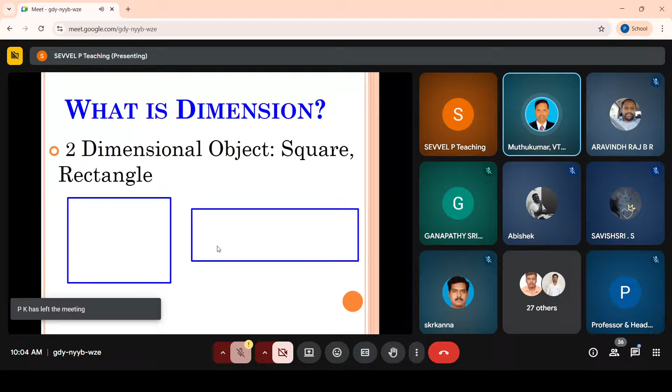Students, please be muted. Speaker has to have attention. Sir, shall I proceed, sir? One second. Sir, everybody make sure you are muted. Speaker has started his speech. Shall I continue, sir? Yes, sir. Please continue, sir. Thank you, sir.

So, a two-dimensional object is going to be a square or rectangle. Now, moving on to a three-dimensional object, any object which has length, height, and width is called a three-dimensional object. Traditionally, you are printing on an A4 sheet like this. Here, the thickness is negligible, so it can be called two-dimensional printing. So, these are 2D printers on the left-hand side, but on the right-hand side, you can see the latest type of printers, which are called 3D printers.

So, what do you mean by the term 3D printing? In local terms, it is called 3D printing, but technologically, we call it additive manufacturing. Additive manufacturing does not have any machining process. In simple words, it is opposite to subtractive machining. In subtractive manufacturing, you remove material from the given specimen and convert it into the required shape and size. But in additive manufacturing, you construct a three-dimensional object.

A three-dimensional object is constructed based on the CAD model which is given to the three-dimensional printing machine. It may work on the technology of FDM, laser metal deposition, selective laser melting or selective laser sintering. Whatever the working principle of that machine, it is connected to software, and in that software you develop a digitalized 3D model. A three-dimensional structure of that model is generated in the software, and whatever structure is present in that software is going to be presented in the form of.

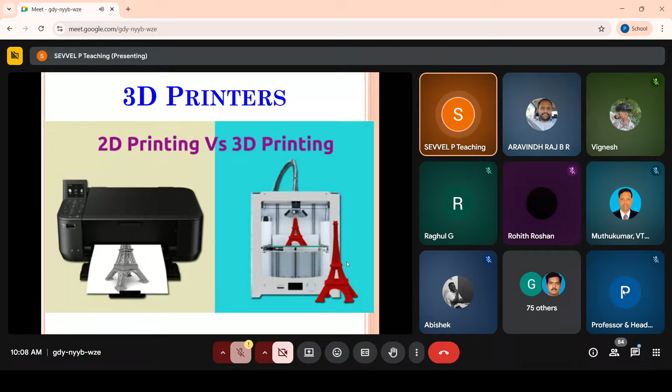Now you can see 2D versus 3D printing. Now I want to show you a small miniature of how the Eiffel Tower is going to be printed directly. I will be showing a short video. This is going to give you a glimpse of how 3D printing works. Here I think you can see the video.

So now if you see this screen, the printer is a very basic model, and this printer is going to print an Eiffel Tower in 3 dimensions. Normally, if you print the Eiffel Tower on an A4 sheet of paper, it is called 2 dimensional. But here you are going to see the 3D printing of an Eiffel Tower. You can see over here.

And if you see here, the printing does not occur entirely at once, it occurs step by step. In better words, technically, layer by layer printing is going to take place, as you can see over here. So the entire 3-dimensional structure is presented in a layer by layer manner.

Dr. Sevvel, sir. Yes, sir. Sir, your voice is not audible. Now is it okay? Now it is audible, sir. Before it was very silent. That's why I asked you, sir.

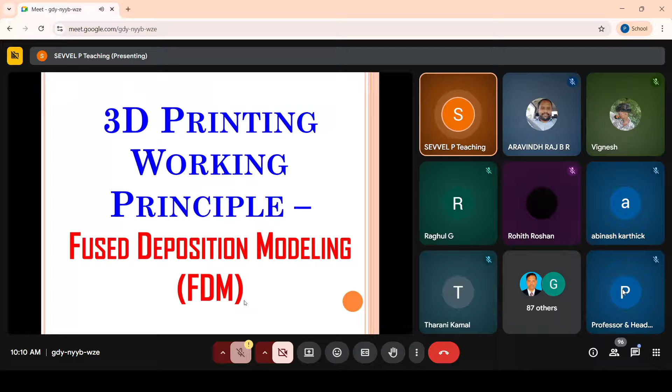Now moving on to how 3D printing works. What is the basic working principle? The basic working principle started with FDM. FDM stands for Fused Deposition Modeling. As you can see over here, I think the slide is visible. So one of the preliminary working principles of 3-dimensional printing was based on FDM, Fused Deposition Modeling. Here there is a machine, which is nothing but a 3D printing machine.

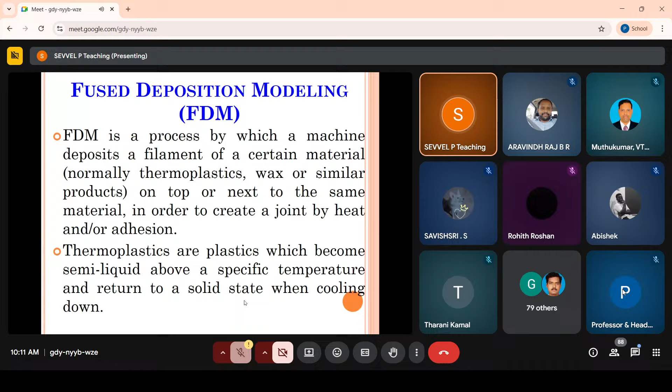It deposits the filament of a particular material. It may be ABS, PLA, Kevlar, nylon, or any type of thermoplastic material or other plastics. Layer by layer it deposits that filament, one over the other, and a bonding is generated by means of heat or adhesion. The plastic being deposited layer by layer is in a semi-liquid state, and it returns to its original solid state after some cooling period.

I think the screen will be visible.

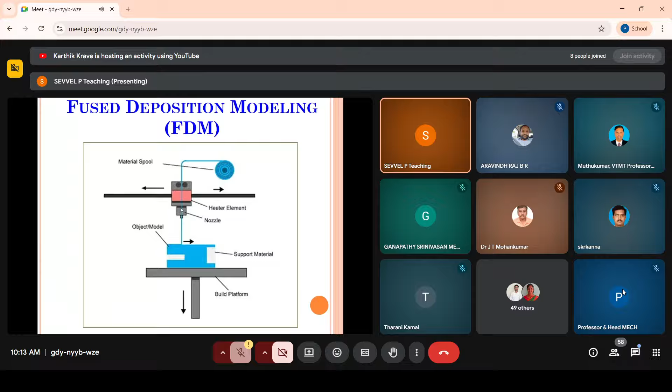So if you want to see animation, here you can see the animation of how the object is going to be printed in a three-dimensional manner using this fused deposition modeling. So here you can see this screen very clearly.

My screen is visible.

So here you can see the three-dimensional object which is going to be printed using this fused deposition modeling process. Here you can see the wire spool, and it is going to be printing in a continuous manner, layer by layer. On the right hand side you can see a teacup which is going to be generated, and on the left hand side you can see an object which is going to be printed layer by layer. So this is the basic working principle.

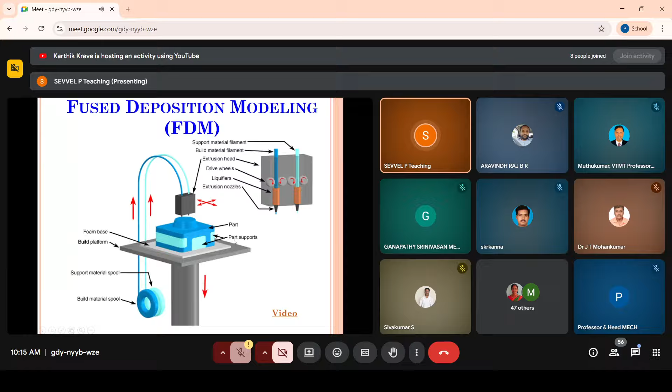And you can see the build platform, and over that the foam base, on which the parts are going to be built. So here you can see two different materials. One is the spool for the build material, another is for the support material. Now I am sharing a video which will give a detailed idea about fused deposition modeling. Please see this video.

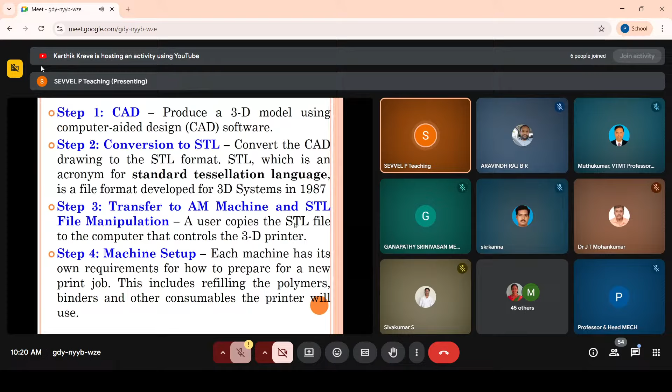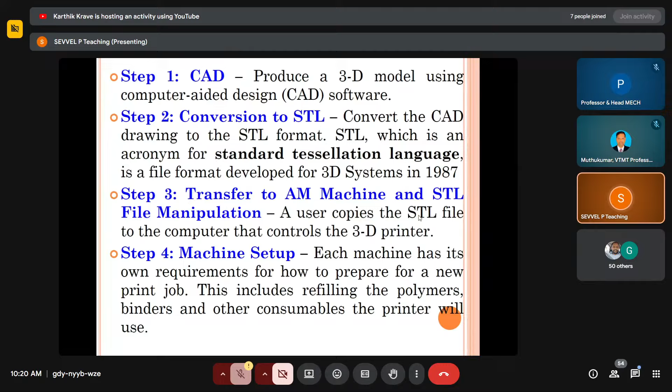STL format stands for Standard Tessellation Language. So whatever your CAD drawing, whether it is drawn in AutoCAD or ProE or CATIA or Unigraphics, it is going to be converted into STL format. Then this STL file is transferred to the additive manufacturing machine. That is step 3, in which the STL file is going to be manipulated, and in the 4th step, the machine is going to have its own requirements, and after refilling the polymers, the binders and the consumables, etc., the printer is about to start.

And the seventh step is going to be post-processing. It includes bathing or removing the unwanted additional structures, etc., so that the complete three-dimensional structure is obtained. Now I am giving you a summary of all these steps. The 3D CAD model is the first step. Then in the second step, you can see an STL file.

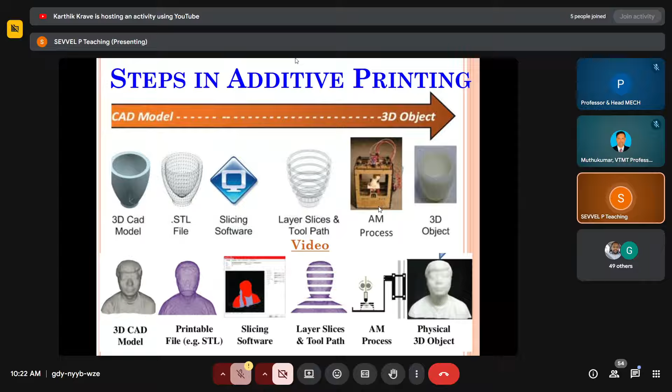Then slicing software is going to be used. The slicing software is going to read and manipulate the STL file, and it is going to print layer by layer. You can see the slices over here, and a three-dimensional object is printed, as you can see in this slide. Below, you can see the human face. And in the third slicing image, you are going to see a photograph which has some built support structures, so that the entire structure is supported and the object is printed.

Then applications of 3D printing you can see over here. These are the various applications. Now, rather than speaking about the applications, I am going to share with you a video which will give a detailed view of the various applications of 3D printing.

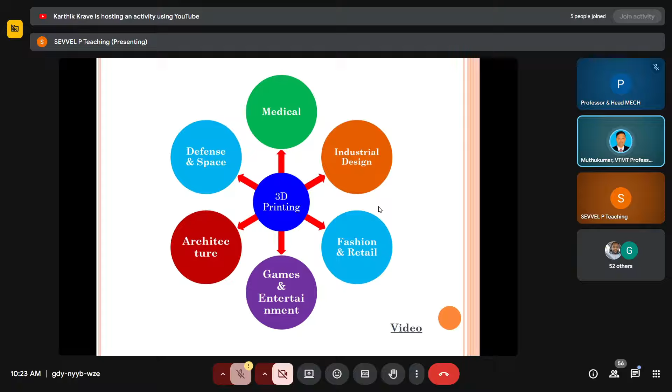Sir, Dr. Sevvel, sir. Yes, sir. Are you sharing any video, sir, right now? Video window is not visible, sir. Yes, sir. Video I am sharing, sir. You do not see that? No, sir. If you can share your entire screen, it will be good, sir. Entire screen. Okay, sir. Stop the sharing and share your entire screen, sir. I am sharing it again, sir. I think you can see the video now. Is it clear, sir? Now it is okay, sir. Okay, sir. Thank you, sir.

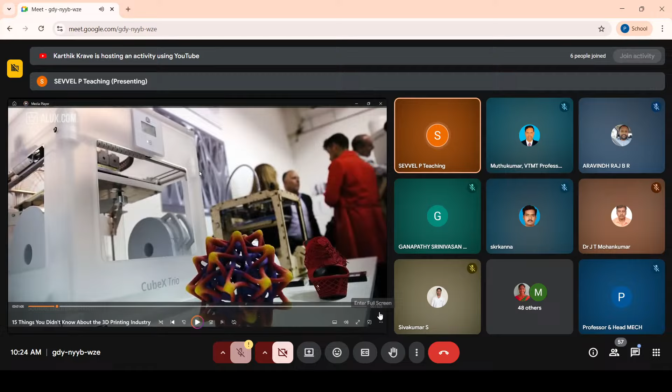So this video gives you a complete idea about the 3D printing industry, and it is going to share some recent advancements which have happened in the 3D printing industry and which have revolutionized various industrial sectors. So please watch this video.

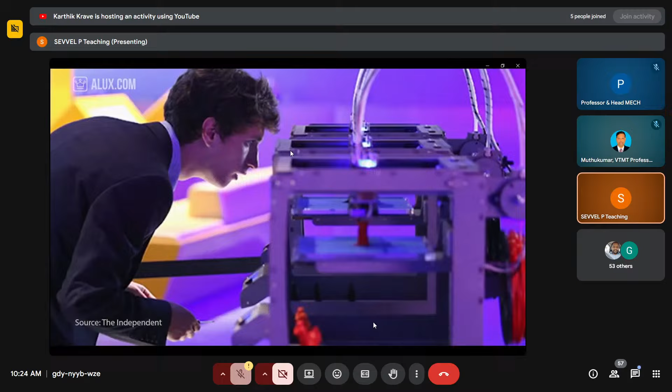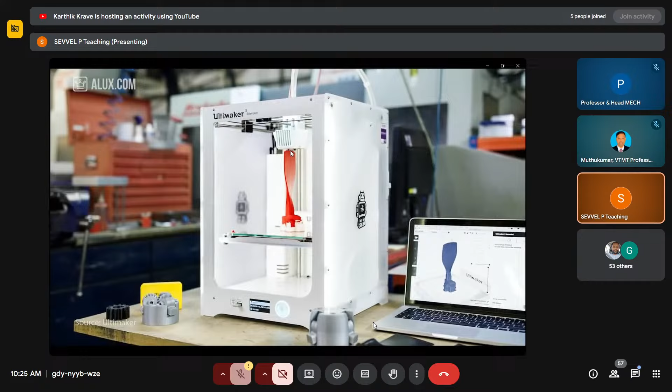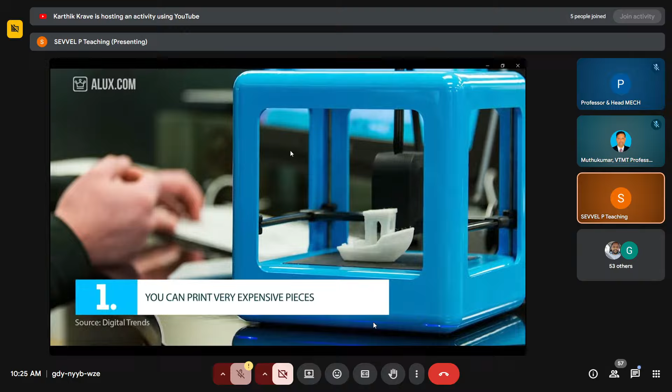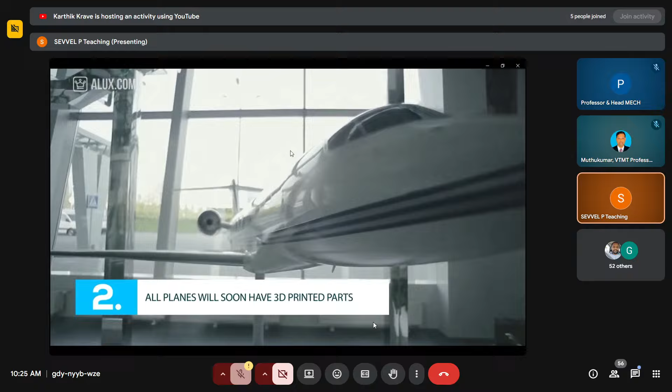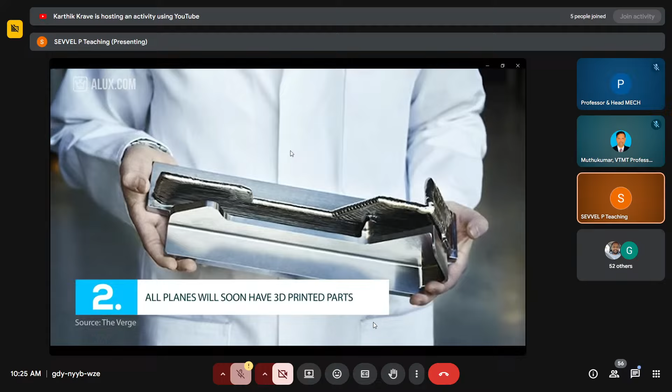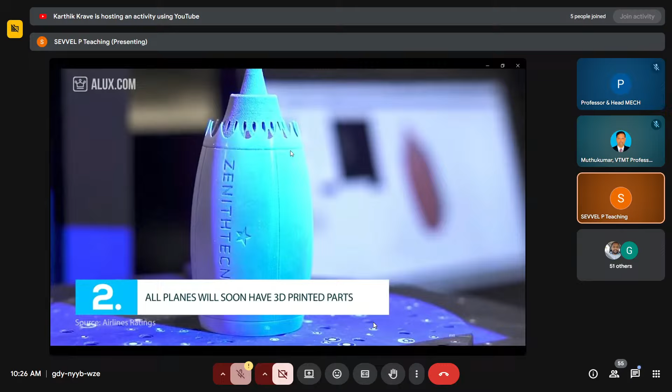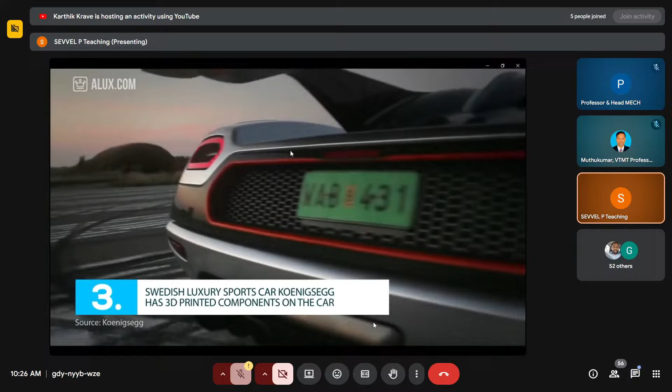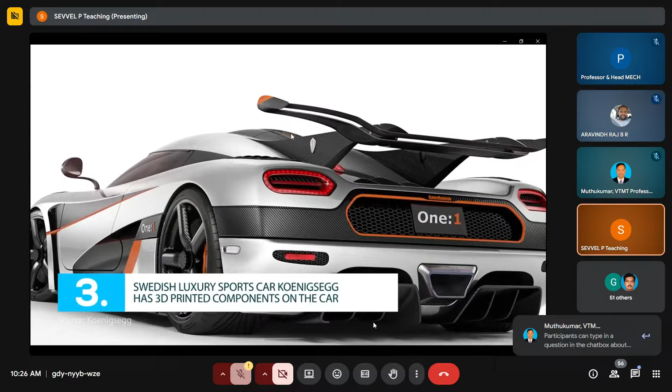Swedish luxury sports car Koenigsegg has 3D printed components in their car. If you're not a luxury sports car fan, you may not know the Swedish brand Koenigsegg, but it's one of the most beautiful, fast, and limited edition cars in the world. The company was born a little over 20 years ago. They only make around 15 cars per year. Of course, it's all manually done and handcrafted with state-of-the-art technology because these beauties are sold for over $2 million each. Although the concept only has a few 3D printed pieces, there is a car called Urbee that has the body and the windows printed.

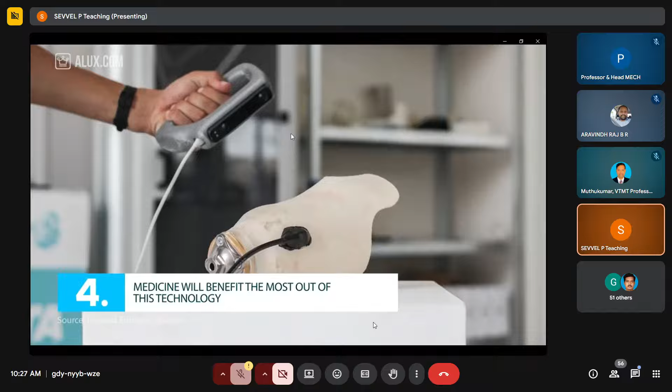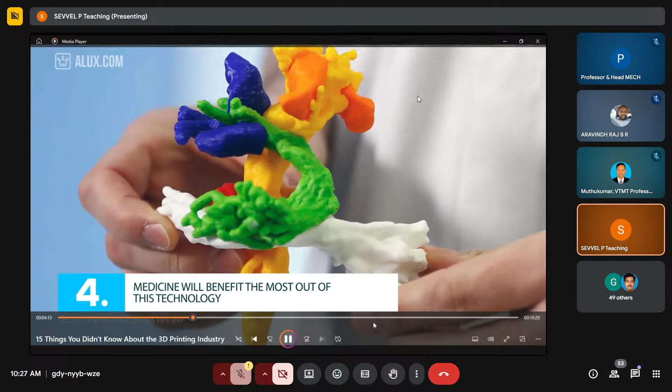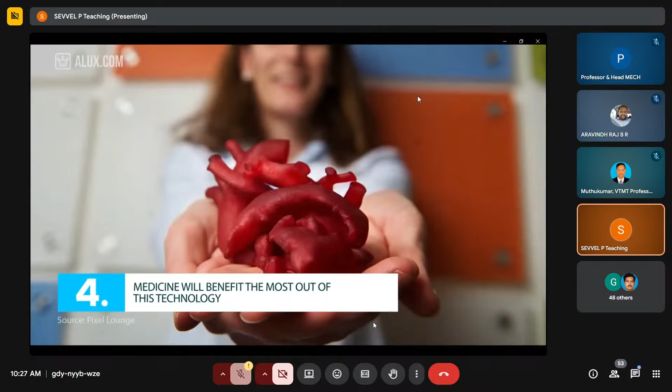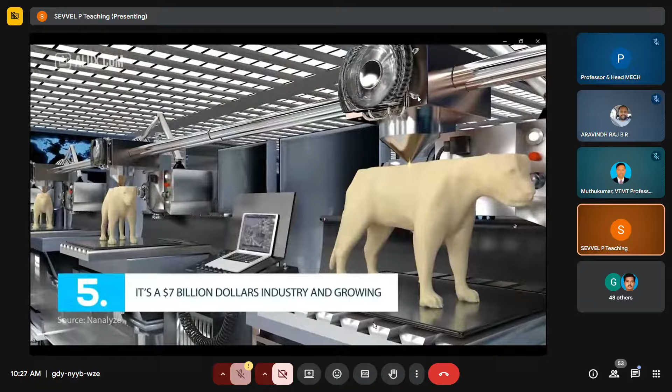Number 4. The world of medicine will benefit the most out of this technology. Next on the 3D printing list is humans. Technology has evolved so much that nowadays a few small things can be printed and then used for medical purposes on humans. This new discovery will help newborn babies and donors. So far, medical 3D printing can do the following: tissue with blood vessels, drugs, prosthetics, bones, heart valves, skin, and organs. These breakthrough printed supplies are currently being tested on animals, and if all goes well, we'll be printing anything in no time. Number 5.

So if you have seen this video, I think now it is visible. They are showing the three major sectors. One is going to be aerospace, another is going to be automotive, and another is going to be medical. Apart from this, it is going to be used in fashion and retail, defense, even in printing of drones, then architectural structures, games or entertainment purposes, etc.

But the three major areas in which 3D printing is gaining traction, which are of more vital importance and which are going to bloom in the coming years, are going to be the automotive sector, the aerospace sector, and medical implants. Not only medical implants, even any organ can be three-dimensionally printed using this 3D printing technology.

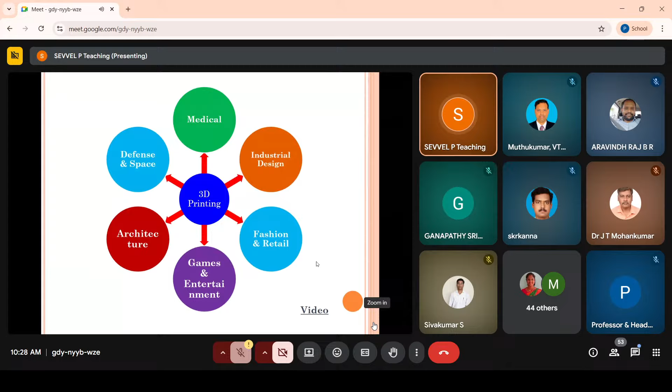Now, before moving on to selective laser melting, what are all the various types of additive manufacturing technologies available? Based on the working principle, they are categorized into 6 different types.

First, if you extrude the material, it is called fused deposition modeling or fused filament fabrication, that is FFF or FDM. The initial process using which we printed 3D material was FDM.

Here you can see the material extrusion processes. It is categorized into 2 divisions: one is the old and traditional fused deposition modeling FDM, and another is fused filament fabrication methodology FFF. Next, if you print the material using a vat photopolymerization technique, it is called stereolithography, that is SLA or DLP.

And if it is a powder bed fusion methodology, it is called selective laser melting, that is SLM, or selective laser sintering, or direct metal laser sintering process DMLS, or EBM. So it's 4 processes, out of which we are going to see SLM in detail today.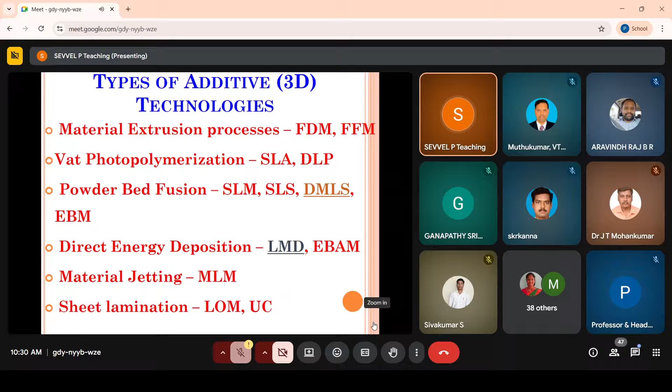Now I am going to share a video about LMD. I will be sharing the screen again so that you can see the video clearly. This is the video which elaborates about the laser metal deposition process.

Here you can see the direct energy deposition. Metal is being deposited in a direct manner using the form of the nozzle. This is laser metal deposition. The laser is used for depositing the material onto the surface of the build platform or the substrate, as you can see here, and metal is built layer by layer.

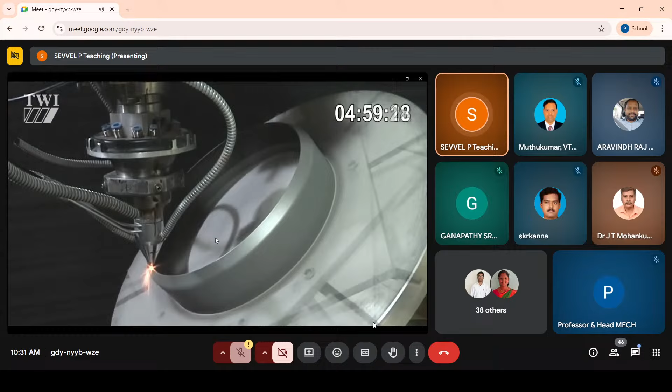On the right hand side, you can see the time running out. So as of now, this is the object which is being printed using this. And you can see the base plate, the platform carrying the base plate is capable of moving in multiple directions: X, Y, front and back, up and down, etc.

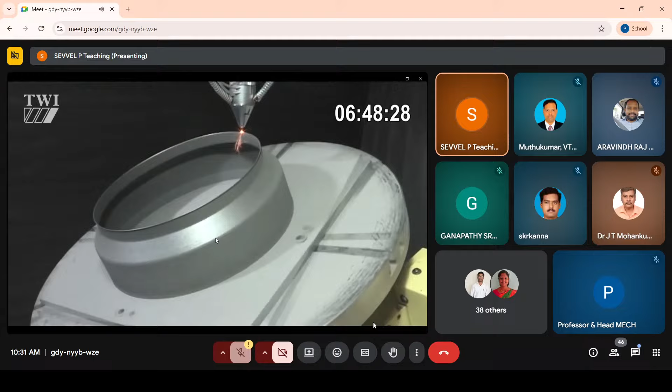You can see a structure getting printed out, and it is a three-dimensional structure. This is the direct energy deposition process, called laser metal deposition. This is also a 3D printing process, an additive manufacturing process, but it is completely different from selective laser melting.

There you use a powder bed fusion technology, but here you use a laser metal deposition, as you can see over here.

I want to show you the final shape. This is the shape which is being printed. So you can see the final shape. It is like a pot-like structure, but it is fabricated out of metal here. So it is a metallic pot. This is laser metal deposition.

So now moving on to the slide again. Now moving on to selective laser melting.

As I already told you, it is a powder bed fusion process, and it was developed in the year 1995 at ILT, that is Fraunhofer Institute for Laser Technology in Germany, and it was patented in the name of Dr. Dieter and Dr. Matthias, who are associates of the ILT research team.

In the selective laser melting process, you are going to have a bed which is full of metallic powder, out of which I want to fabricate the structure. So if I want to fabricate a structure out of aluminum, the bed is going to have aluminum powder. Or if I am going to fabricate a structure out of titanium, it is going to have a titanium bed, as you can see over here.

I will be showing a video which will explain clearly how this selective laser melting is going to work. So I will be sharing the screen again, so that you will be getting the video clearly. Please see this video, it is going to give you a detailed process about this selective laser melting and how it is going to work.

So here basically the principle is using the process of heat. Heat is going to be used for melting the metal powders. And you are going to have perfect precision in the part which is 3D printed, and you are going to print the material layer by layer, as you can see over here, a layer by layer printed structure.

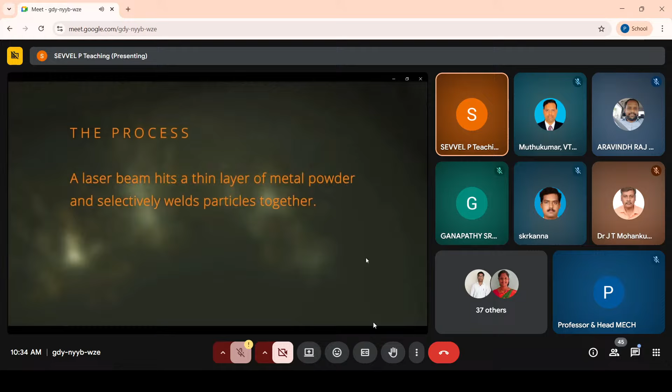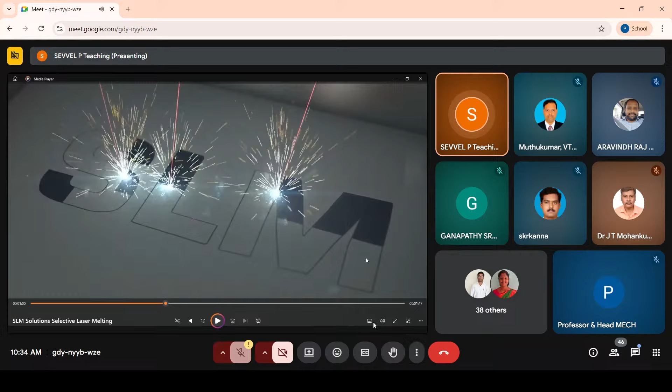So you can see this, you will be getting a clear idea. You can see a laser beam which is going to pass onto a powder bed, which is going to be fed completely with metallic powder, and layer by layer at specific parts the laser beam is going to melt that metallic powder, and a joint is going to be formed when melting takes place one over the other. Now you can see this, how it is going to happen.

So if you can see this, this is going to be the build material. The entire build layer is going to be filled up with the aluminum powder or titanium powder or stainless steel powder, as you can see over here. And a laser beam which travels at a particular velocity, that is called your scanning speed. And the laser power is going to be emitted at 500 watts or 600 watts or 700 watts, etc., based on the metal capability.

This laser beam is going to melt the metallic powders, and the laser beam falls on some particular specific place, and when it falls on that specific place, the metallic powder present there gets melted. When the layer by layer melting takes place, the 3-dimensional structure is attained. So that is going to be the working principle of selective laser melting.

In simple words, selective laser melting uses a high power laser, and it is a laser powder bed fusion process in which the metal powders are fused one over the other using the heat generated from the laser beam. So if you want, I can share a very clear video which shows how these 3D structures are printed.

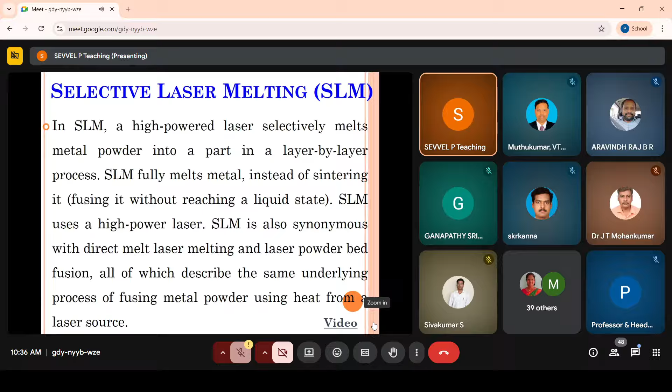So this is the structure I want to print. Say for example, this is the structure I want to print, and here you can see the exact structure which is going to be printed over here. Now for printing this 3-dimensional structure using selective laser melting, I am going to follow this procedure.

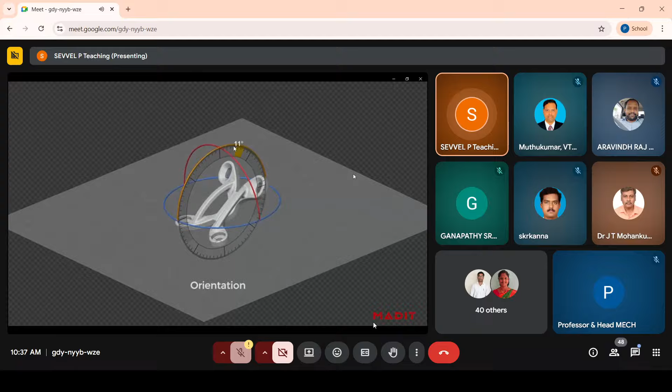First I am going to orient the angle at which the object must be printed. The object cannot be printed as it is in space; it requires some support. It must lie down on the substrate at some particular orientation or at a particular angle. For that, I need some support structures, so I am going to define the support structures first. This is going to be the working principle of selective laser melting.

Let me define this once again. If I want to print a 3-dimensional structure, I want to define the orientation, or specify the angle at which the object must be printed. So if I put it at some particular angle, the object cannot lie in space. It needs some supports; it must lie down on some support structures.

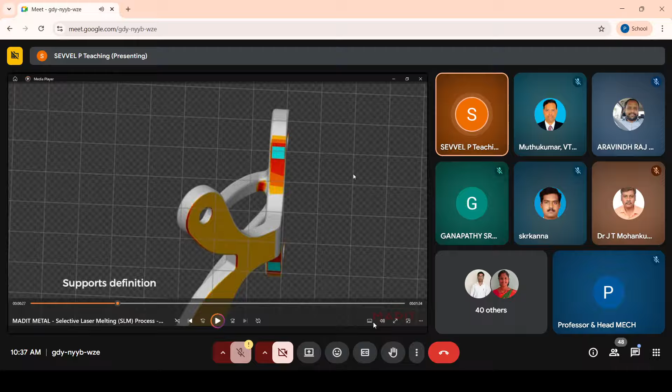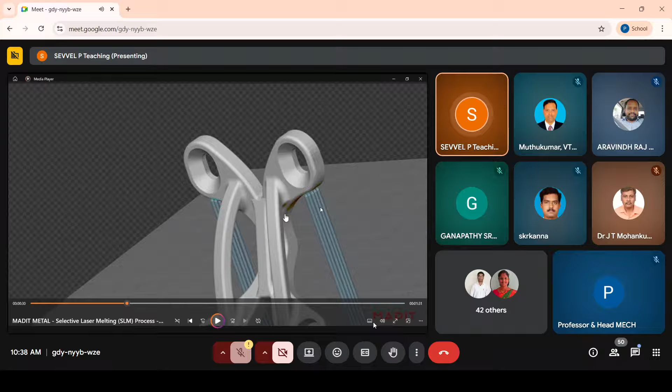For that, I am defining the support structures as you can see in this video. This is going to be support structures, which is going to be built out of the support material, which is going to be very thin when compared with the base material or the build material. Because I am going to break the support structures after printing the 3D structure, they are going to be unwanted after fabrication of the entire specimen. So for breaking them easily, they must be brittle and weaker compared with your build structure.

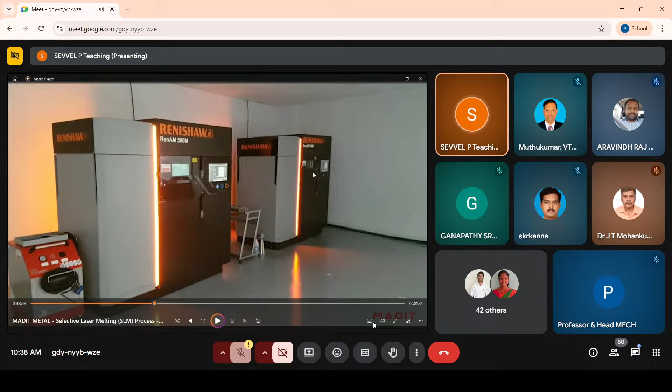So if I am going to fabricate in batches, you can see I am placing them at various angles. Now I am going to start the process. Here you can see a realistic photograph of a selective laser melting machine. Now they are going to print the same structure you saw a few seconds before, using this machine.

So this is going to be the entire platform which carries the metal powders. Now layer by layer, powder is being fed onto it. Here you can see the intensity of the laser beam being used for melting this metal powder—it may be aluminum, inconel, or titanium. It is going to be 500 watts, and it is traveling at a speed of 1 meter per second, so in 1 second it travels 1 meter.

So deposition takes place here, and the laser beam has melted a particular portion, as you can see. After the printing process is completed, here you can see the three-dimensional structure being fabricated. Now you can see the entire structure which got fabricated, and the remaining powder has been completely recovered—nearly 99% of the powder has been recovered, as you can see.

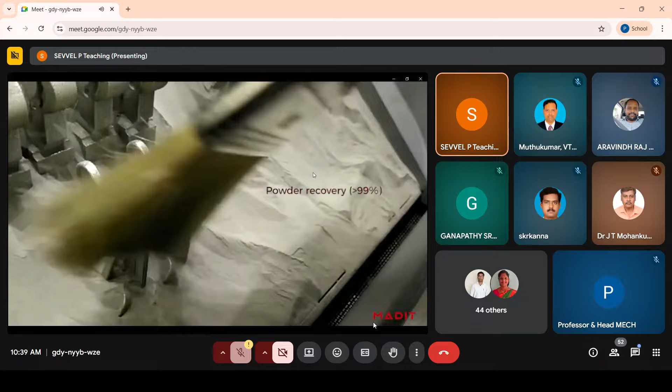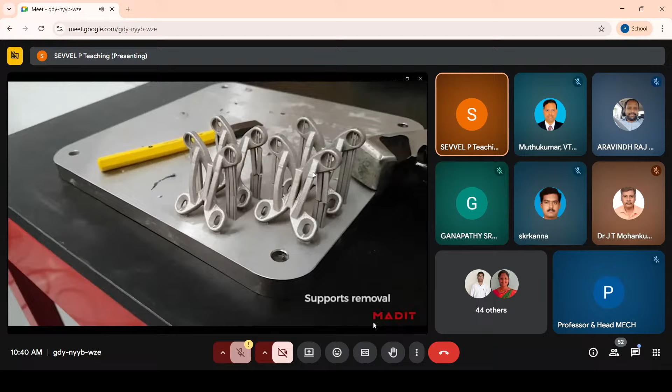So this is the entire printed specimen, but additionally it has support structures, which are going to be removed, as you can see. Now we are going to remove the support material—very simple, because they are very light and of minimum strength, so they are easily removed.

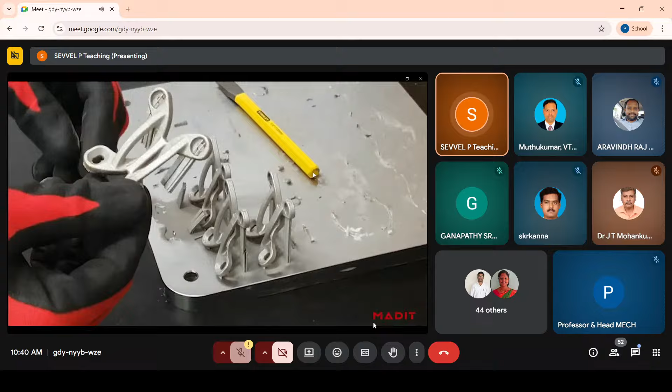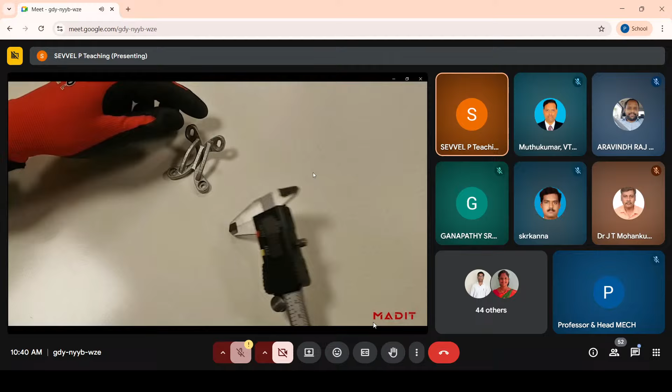After that, we are going to do the sandblasting process, so that unwanted material sticking onto the surface of the printed specimen is removed. And you are checking for the dimensions, as you can see—that is, the validation process is being carried out.

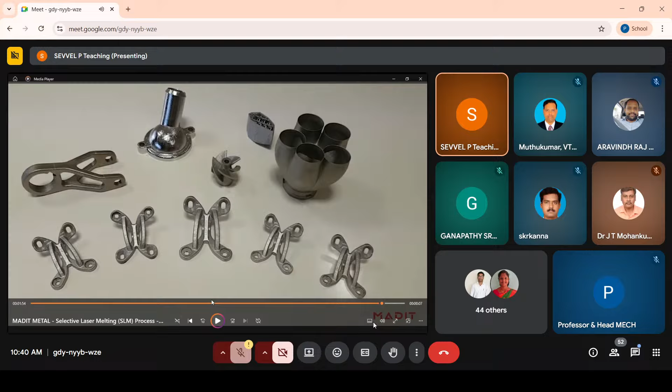So now you can see the entire 3D printed specimen using this selective laser melting. If you see this particular part, the laser beam is falling onto the metal powder bed, and in that portion, the laser beam transfers heat onto the metallic powder. The metallic powder gets melted one over the other, and fusion takes place.

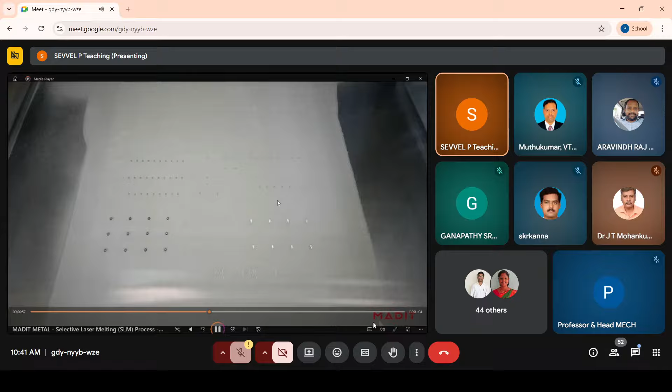So I will be closing this video.

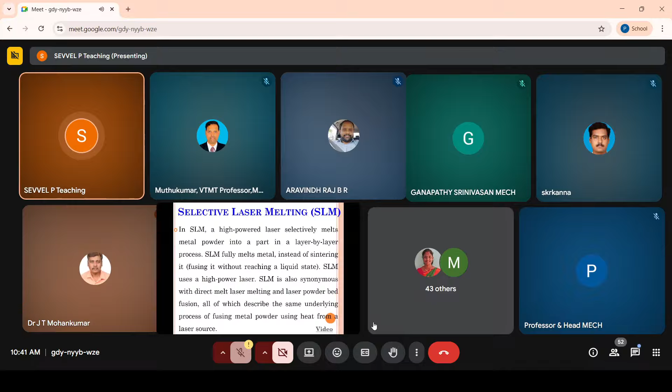So I think we have got a clear idea about selective laser melting. Whatever you have seen, now you can see it in the form of a three-dimensional view, as shown here. Now, moving on to the parameters.

With respect to the research scope in selective laser melting, in India we have selective laser melting facilities in Bangalore and in Chennai. In Chennai, this selective laser melting process is present in some private industries.

If you look at what parameters can be varied, there are a lot of them. First, the intensity of the laser and what type of laser you are going to use, and the scanning speed of the laser. Then, the strategy you follow for scanning the laser beam, and the hatch spacing left out. This relates to laser-relevant properties, and the spot size generated by the laser beam. So, in total, you have 6 parameters that can be varied with respect to the laser alone.

This area is going to be better suited for the optimization process, so that you can vary the optimization process, and you can use some advanced software, AI based, ML based building software for optimizing these parameters.

And with respect to the powder bed, you are going to have some parameters. First, the deposition strategy: how the metal powders are deposited, what strategy you are going to follow, what is going to be the depth of each and every layer, the density of that particular metal powder bed, its temperature, and how the building chamber atmosphere is going to be maintained. What type of gas you are going to use inside the building chamber is also going to play a very important role.

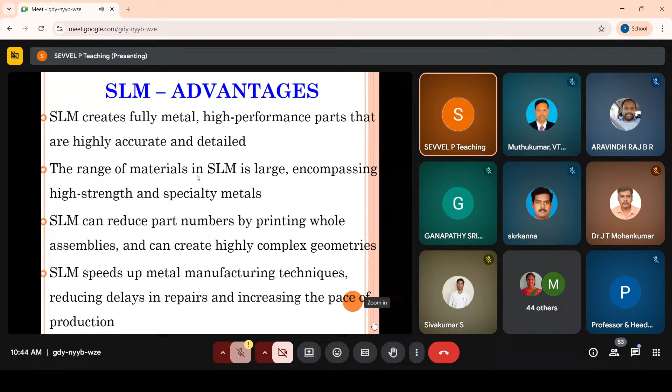And the parts fabricated using selective laser melting are going to be fabricated at a much faster rate when compared with other 3D printing processes, and it reduces the delay times. So these are the advantages of selective laser melting. Next, what are going to be the drawbacks? If you see the drawbacks, you need extensive support structures. That is going to be one of the most important requirements.

For support structures alone, you have to spend some amount, and you need a specific type of inert gas for maintaining the atmosphere inside the selective laser melting printing environment. And it is a high energy process, so it is going to have some stress, and dislocation of the parts is possible, and there is going to be some compromise in the structural integrity of the fabricated parts.

And the surface generated by selective laser melting is normally going to be rough, and you need some post-processing techniques to give it a perfect surface finish. These are all going to be drawbacks. Despite its drawbacks, selective laser melting is going to have a wide variety of applications in automobile sectors, aerospace sectors, and medical, especially dental and medical engineering equipment, implants, prostheses, etc. It is going to have a lot of applications.

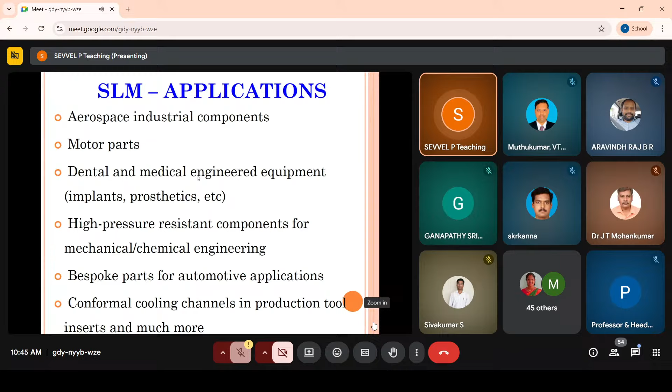Then it is used in fabrication of various types of production tool inserts, as you can see over here. Then, what are the types of materials being fabricated using selective laser melting? I already told you, you can fabricate copper, aluminum, stainless steel, inconel, nickel-based superalloys, cobalt, tungsten, and even titanium. And the tungsten parts fabricated using selective laser melting are very famous in the automobile sectors.

And you can fabricate various materials like 15-5 stainless steel, 17-4 stainless steel, maraging steels, cobalt chromium, and especially titanium alloy Ti6Al4V, etc. using this process. So this is about selective laser melting. Now, moving on to the various research scopes in selective laser melting.

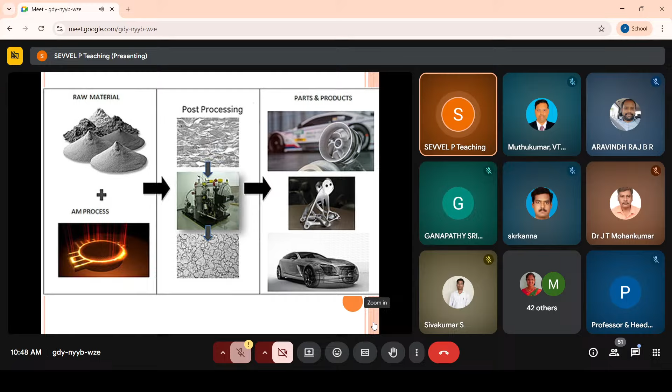And you are going to have the exhaust emissions, which have aluminum alloys as their raw material. It is going to be used in cooling vents. So these are the applications with respect to the automobile sector. And you can see the process: your raw material is going to be in powder form, and you subject it to selective laser melting. As I already told you, selective laser melting needs a lot of post-processing, and the automobile parts are fabricated, as you can see in this slide.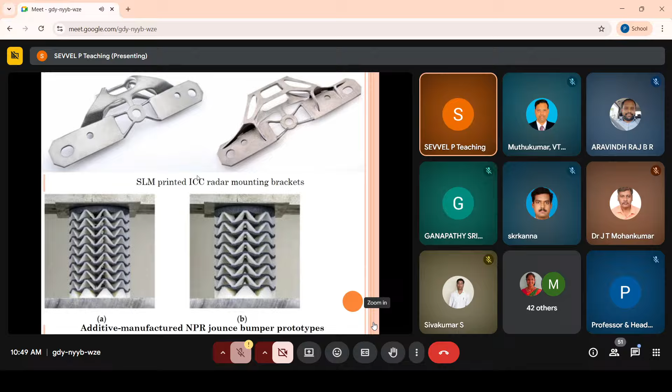Next, you can see some of the automobile components which are fabricated using this selective laser melting process. ICC, Intelligent Cruise Control radars. You would have heard about ICC, which is used in recent automobiles, which stands for Intelligent Cruise Control. So those radar mounting brackets and the bumper prototypes are fabricated using selective laser melting.

Moving on from the automotive sector, we also have wide applications in aerospace sectors. The major structural seat components in aerospace are fabricated using this selective laser melting process. You can see the armrest, the seat leg assembly, the baggage bar, the spreader bars, even the seat back frames, the back pan, the cross tube; everything is fabricated as selective laser melted three-dimensional structures. So the armrest structure, the back pan, and the seat back frame structures fabricated this way are used in aerospace structures.

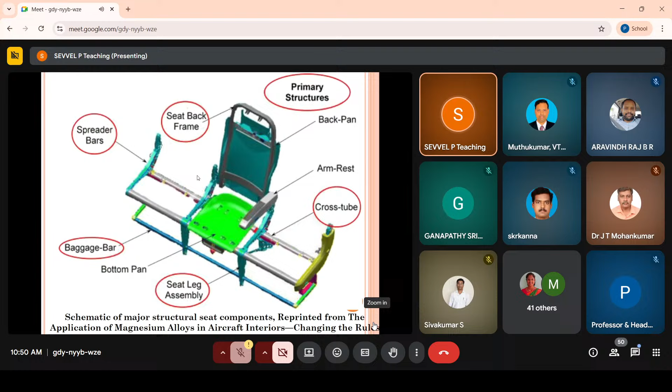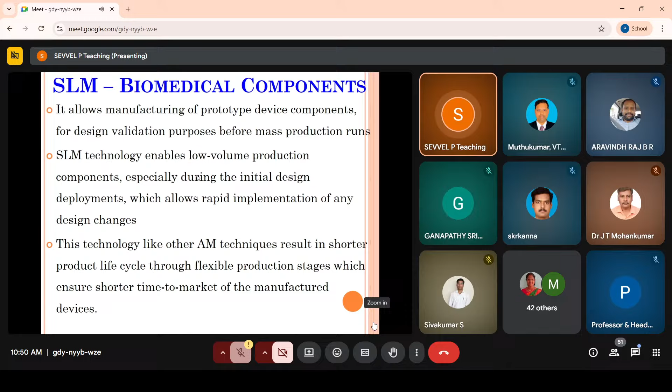And I don't want to limit my presentation to automotive and aerospace sectors alone. Another scope is available even for mechanical engineers, because a lot of biomedical components are also fabricated using this selective laser melting process. If you look at the components being printed and the advantages, you have a wide variety of design freedom in designing these components. The cost is very minimal compared with traditional methods, the parts are fabricated in time, the quality perfectly meets the requirement, you can validate the entire design by the prototype itself, and it is an environmentally friendly process.

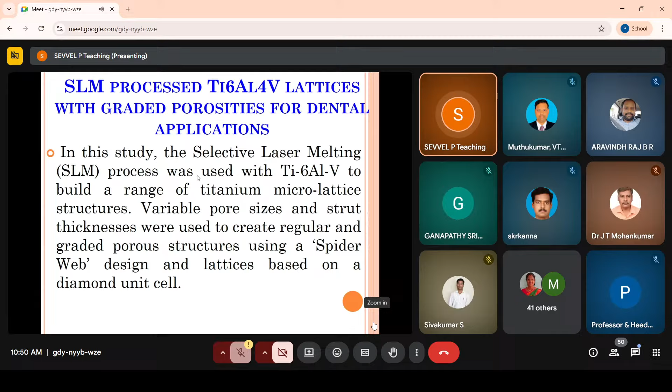So I want to share a paper on printed titanium, especially for dental applications. Now I'm going to show the video so that you get a clear idea of how the structure is printed. It is going to be a dental structure. So you can see the dental structure being printed using this selective laser melting process.

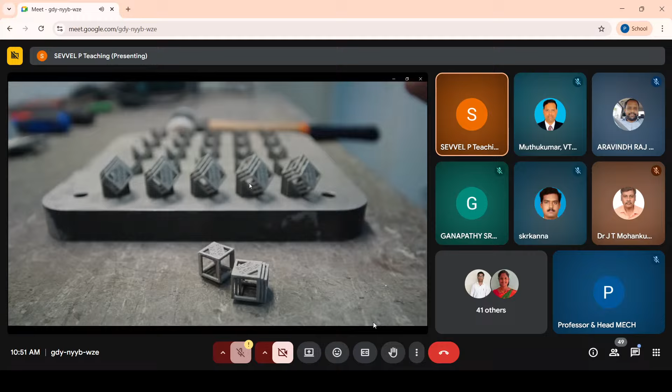So you can see some of the structures which are being printed using this selective laser melting process. You can see the laser beam is being passed on to the bed, which is going to carry the entire metal powders, and layer by layer the laser beam is going to melt those metal powders, and another powder layer is going to be fed onto that. So layer by layer melting of the metal powder is going to take place, and finally you are going to take the specimen out, as you can see over here.

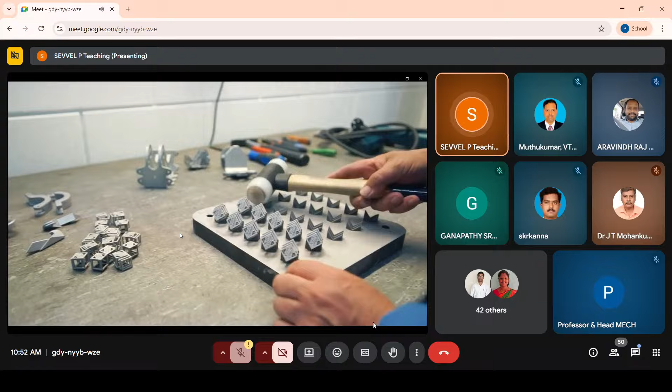This shows you the realistic view of the entire 3D printing machine, as you can see over here, and they are collecting the entire powder back. Nearly 90% of the powder is going to be collected back, and now they are taking the fabricated specimen out of the substrate, that is out of the building plate. You can see over here. So this is going to be a printing of structures in mass production, which is going to take place in batches.

So like this, instead of creating solid dental implants, they have created spider web like structure dental implants, which are going to have enhanced quality and enhanced performance when compared with the traditional type of dental implants. So this is going to be one of the areas.

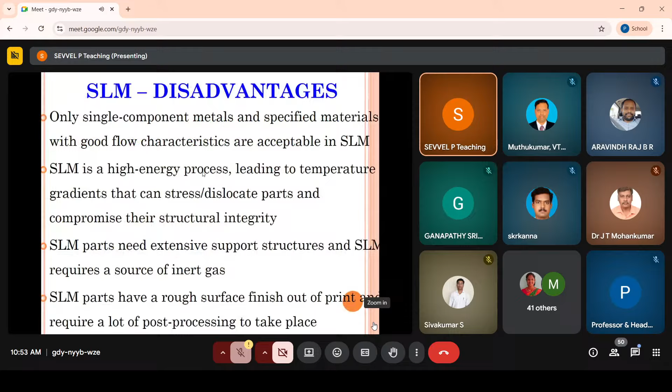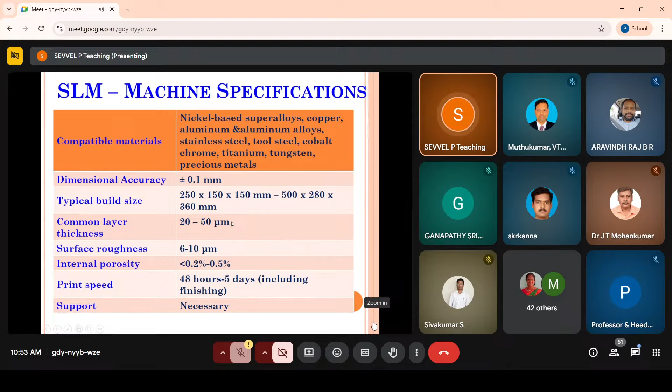So the areas where you can concentrate is that you can concentrate on fabricating the selective laser melting parts by varying the parameters. Say for example, the common layer thickness is going to be 20 to 50 microns. Here you can vary the thickness. You can vary the type of the laser which you are going to use, the scanning rate, the scanning speed at which the parts are going to be printed. Even you can vary the hatch spacing distance and scanning strategy.

So with respect to laser, the four things which are normally used in the papers are the intensity of the laser, that is the laser power, then scanning speed in mm per second, then hatch spacing distance in microns or in mm, then scanning strategy, in what orientation you are going to build the entire thing. Then with respect to powder bed related properties, you can vary the building chamber atmosphere, what type of gas you are going to use, and the powder layer depth.

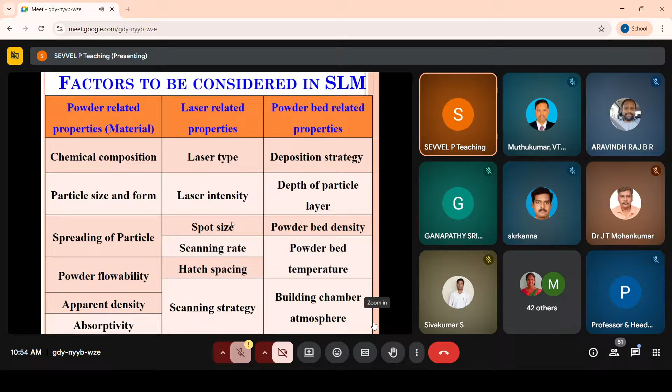And with respect to the powder related properties, you can vary the size of the particle and you can vary the density of the powder. So these two parameters are going to play a very important role. So here we have a combination of nearly 8 different parameters which can be varied by using Taguchi or response surface methodology or advanced AI based and machine learning based techniques. So these are the various factors which can be considered in selective laser melting.

So a wide variety of parts and prototypes are being fabricated, and what type of material can you print? As I already told, you can print using aluminum, stainless steel, titanium, tungsten or nickel based alloys, and even Inconel can be printed. Already many people have started their work in aluminum. So you can go for titanium or stainless steel or nickel based alloys, or Inconel. These are the materials which have more chances of converting into a paper and getting accepted.